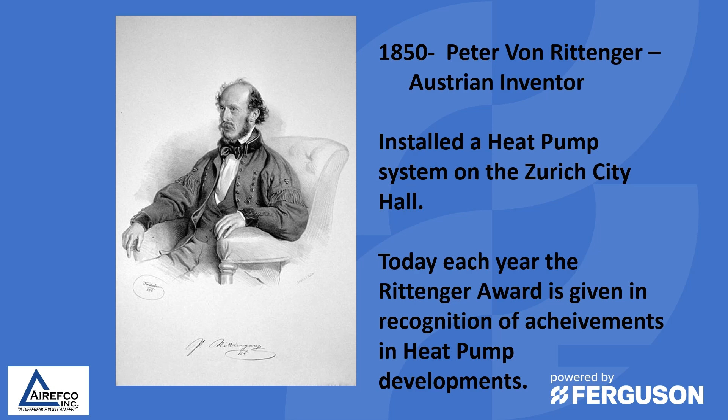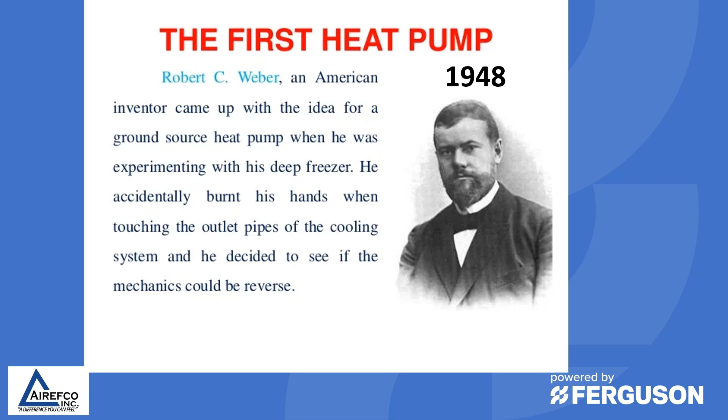In 1960, 1.8% of homes in the U.S. used electricity for heating. 81% of homes used fossil fuel for heat. In 1970, 7.7% of homes in the U.S. used electricity for heating. The oil crisis of 1970 made heat pumps even more attractive. In 1980, 18.4% of homes in the U.S. used electricity for heating. Before 1980, SEER ratings were 6 or less, and HSPF was 6.8.

In 1992, the DOE raised the standards of SEER to 10 and HSPF to 6.8. In 2006, DOE again raised the standard of SEER to 13 and HSPF to 7.7. In 2015, DOE raised SEER to 14 and HSPF to 8.2.

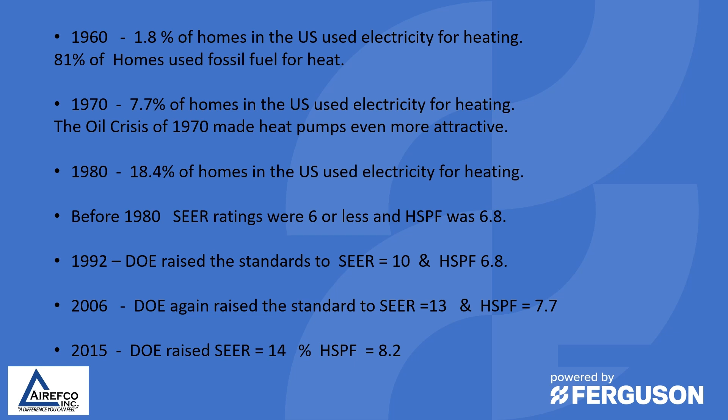So today, energy savings is the big thing in most people's minds. And as you can see over the years, with 8 SEER there was 0% savings, whereas today there's 65% savings with a 23 SEER. So energy savings have gone up, and air conditioners and heat pumps have become more and more efficient.

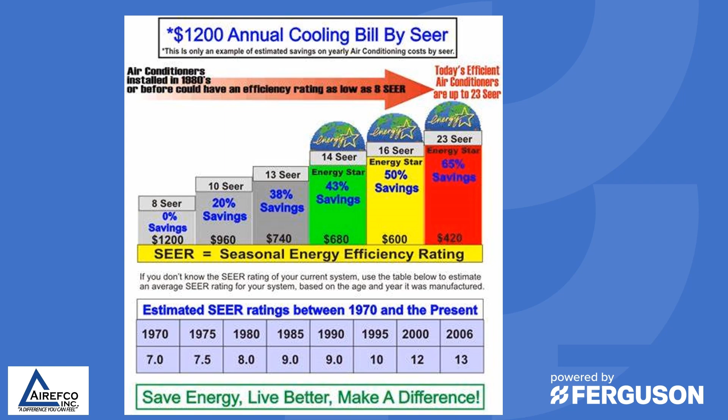All of your units today have an energy guide stamped on them, and this is what the homeowner is basically looking for to see what savings they're going to make on upgrading to a new higher efficiency unit. So the higher the SEER rating and the HSPF, the more savings they will see from that unit.

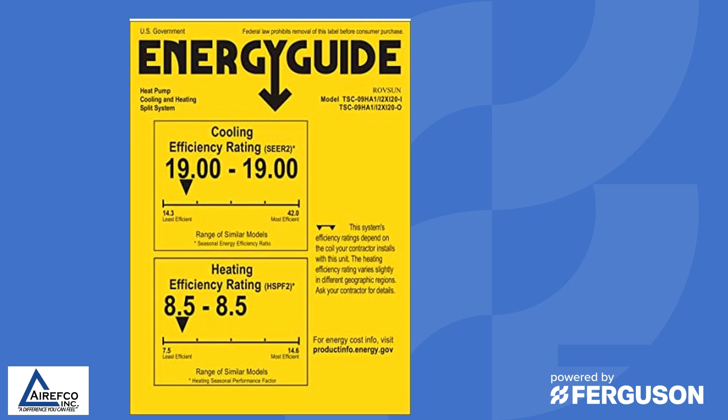So the SEER, or Seasonal Energy Efficiency Rating, is the cooling output during a typical cooling season divided by the total electrical input during the same period. Typical SEER ratings start at 13 and can go as high as 21 SEER.

HSPF, or Heating Seasonal Performance Factor, is the ratio of heat output measured in BTUs over the heating season to electricity used measured in watt hours. In 2023, the national HSPF standard was 8.3, and it will be going to 8.8 soon.

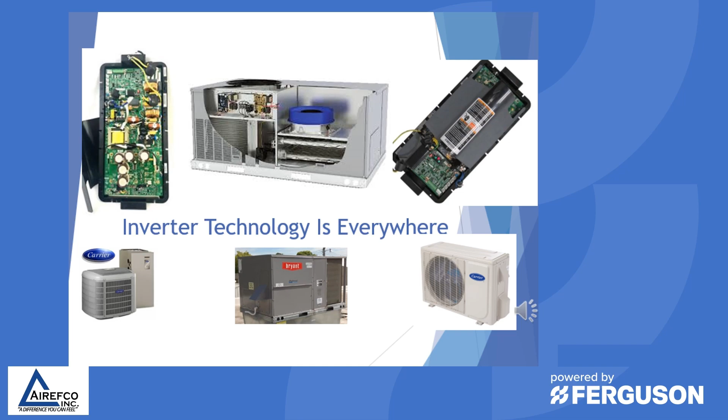Inverter technology is everywhere, not only in ductless product, but also in split system residential and light commercial product. This is driving the efficiency ratios of equipment through the roof. Inverter technology in ductless has been driving the market, as ductless can run down to minus temperatures and still produce a lot of heat. This technology is now coming into residential split systems, so a standard heat pump with an inverter driving it can run down to much lower temperatures than a standard heat pump.

So when trying to explain inverter technology, I use a modern airliner, which lands at speeds in the range of 150 to 170 miles an hour, depending on its weight at landing. This means that the wheels on the landing gear, which are not turning at all, must go from 0 to 150 or 170 miles per hour in a matter of seconds as they hit the concrete. This places extreme wear and tear on the rubber tires.

In an HVAC system where the compressor is controlled by a contactor to start the compressor, which is sitting there idle, the compressor must go from 0 to operating RPM in a matter of seconds. As with the tires on the airliner, this puts the compressor under great stress at startup.

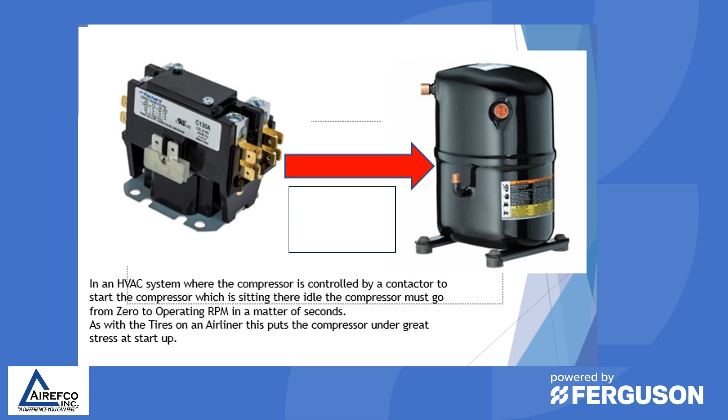But in an HVAC system where an inverter controls the compressor operation, the compressor starts slow at low RPM, and depending on the load will slowly ramp up to operating speed. And when the cycle is complete, the inverter will slow the compressor down gradually to complete shutoff. This reduces the wear and tear on the compressor, increasing the life of the compressor.

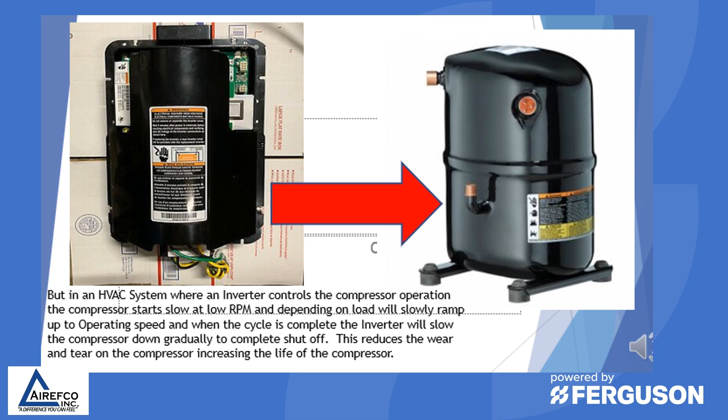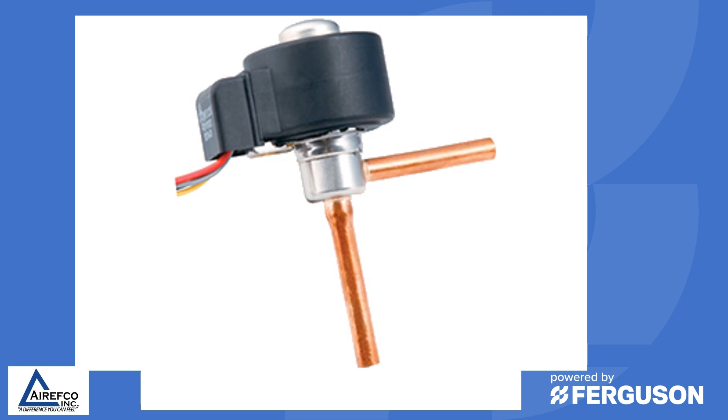Another thing that you'll find on modern heat pumps is that instead of having a thermal expansion valve which meters the refrigerant into the outdoor unit, we have electronic expansion valves, which allow for much closer control of the refrigerant being metered to the outdoor unit. This, in combination with an inverter control, will allow the heat pump to run down into minus temperatures and still produce a lot of heat.

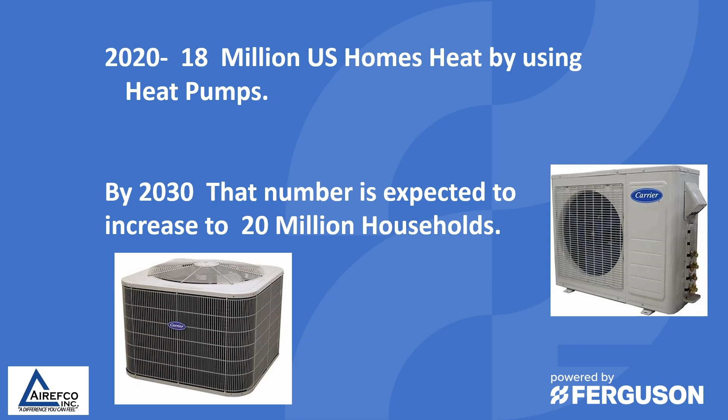So in 2020, 18 million U.S. homes were heated using a heat pump. It is projected that by 2030, that number will increase to 20 million households.